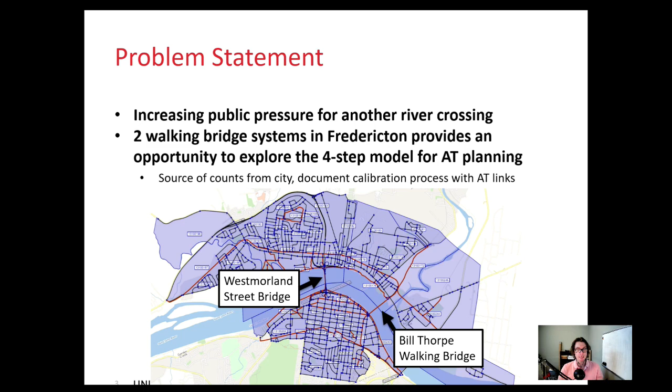Are there fewer people because even though it might look like a more direct route, the population isn't there? It's actually closer to the Bill Thorpe Bridge. So either way, we thought, given that the 4-step model is not typically used in smaller cities, they typically use what's called a 3-step model. That is, they're really planning for car trips only and not for any other trips that can go by other modes. So our hypothesis was that users are paying some kind of cost penalty to the Westmoreland Street Bridge.

What does that mean? Well, if both bridges were equal in terms of how people like them, you would assume that if the travel times were the same, then half the trips would go on one bridge and half the trips would go on the other, that people wouldn't have a preference for one over the other.

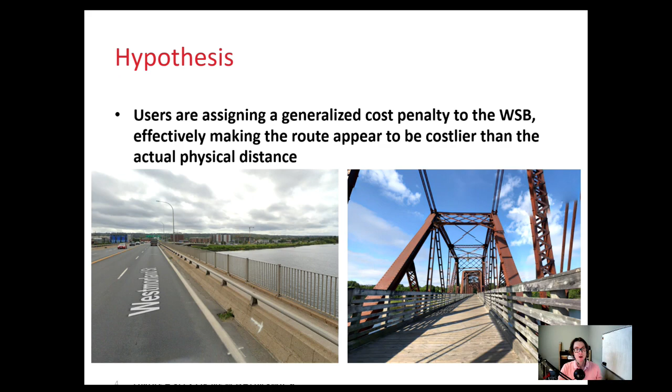You notice we didn't include transit here. And I really wish we could have. The thing is that, for one, at the time, we didn't have any numbers for transit. We didn't have any idea of how many people were taking the transit on a zone-by-zone basis. In addition, when compared to cars, bikes, and walking for going to work, transit is about 1% in the city of Fredericton. So we could have done a lot of work to put the model together, but it probably wouldn't have told us anything different by including those transit trips.

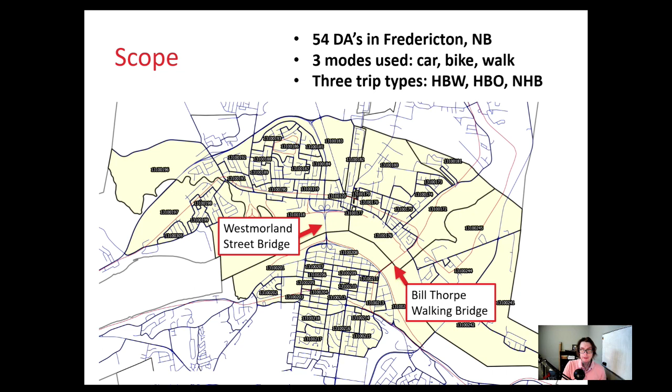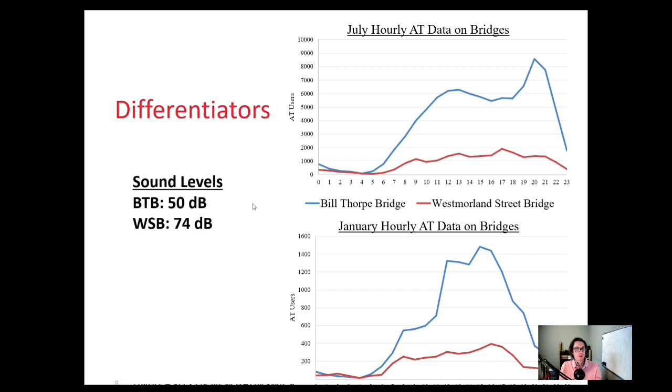So then the first thing was, let's see if we could do everything we could possibly do, how close can we get to the numbers that are in reality? Then the second thing would be, let's calibrate everything, the Westmoreland Street Bridge, and see what numbers we get. And then finally, let's add in a new bridge. Let's have some fun and see what would happen to put a new bridge in.

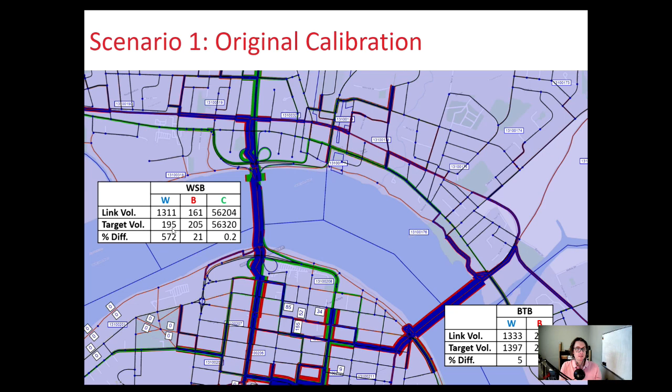And so what we see is that there should be about 1,000 more walking trips on the Westmoreland Street Bridge than there are in reality. The perceptions are probably correct. It is theoretically a shorter way for people to go, but they're not using it to what we should expect. So then we said, well, what can we do to make this work? How do we make these volumes get close? Do the one thing that we could change, and that was the length of the bridge.

Why would we change the length of the bridge? Well, again, people are paying some kind of penalty for that bridge. They don't like it. So we're trying to equate it to something that we could probably easily define. And what we did is I said, well, let's make the bridge longer to the point at which the volumes on the bridge for our model equate to what they are in reality. So this segment length here is about 500 meters. In our model, we kept increasing that length more and more, until we got to about 2 kilometers.

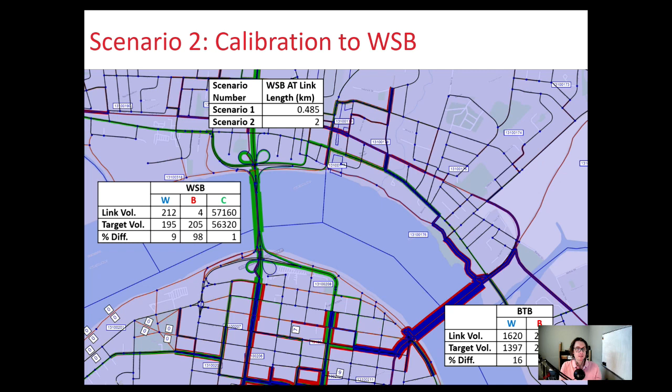So what that meant was that in order for us to calibrate this, in order for the volumes to match what it is in reality, it's like people were thinking this bridge was 3 to 4 times longer than it actually is. That's the equivalent penalty that people are paying. So we decided, well, let's put in another bridge. We can do that. All it is is a matter of drawing a link. The hard part's building the model. And we know that the city has looked at this in the past, and it's quite expensive to do this, and I don't know if we even know if it's possible to do this on the piers. But in a model, links are cheap, so that's what we did.

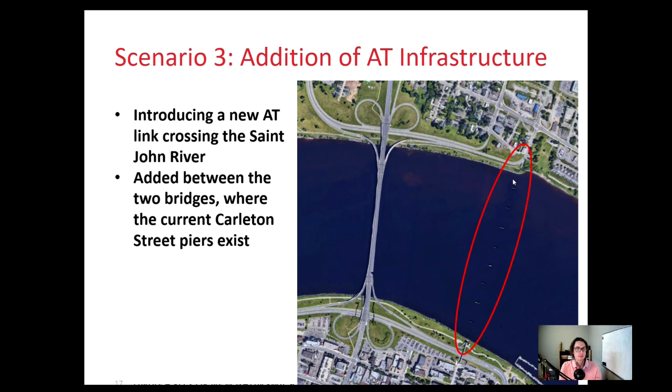So we put in this extra link, and what did we find? Well, because people pay a penalty to use Westmoreland Street Bridge, everybody who was going there would go to this new link. And it also would draw from people that are now going a little bit longer over on the Bill Thorpe Bridge. You'd expect, on average per day, about 2,000 active transportation trips. Everybody that was on Westmoreland Street Bridge would go there, and it would take some from the other bridge. So that's suggesting that if they were to build a new link or to upgrade the bridge so that it was more attractive compared to the Bill Thorpe Bridge, that it would attract users.

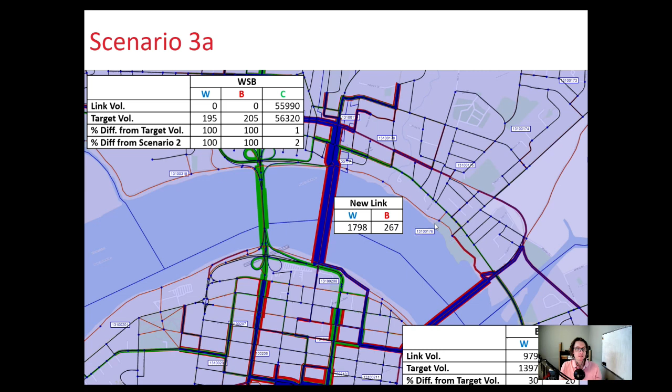There are some limitations with our work. With this kind of work, we didn't include anything about recreation trips, though we did account for non-home based trips. And we're using journey to work data, and journey to work only covers really a small percentage of overall trip making, so it's not perfect. But given what we were able to determine with this, from what I can tell, it's one of the first applications, certainly in a small city sense, to see whether you could answer this kind of question with this particular model: whether an active transportation link would attract users and reduce automobile use.

So from our model, it's basically people are looking at the bridge like it needs to be 3 to 4 times longer to AT users. And we ended up taking some numbers from Los Angeles, a very car-dependent city, and they seem to work for Fredericton. And my final point is that there's a lot of value for small cities: if you're trying to determine the connection between active transportation use and driving, whether people are going to change from one to the other, a model like this helps you compare and can help you answer whether an AT infrastructure upgrade would result in some change.

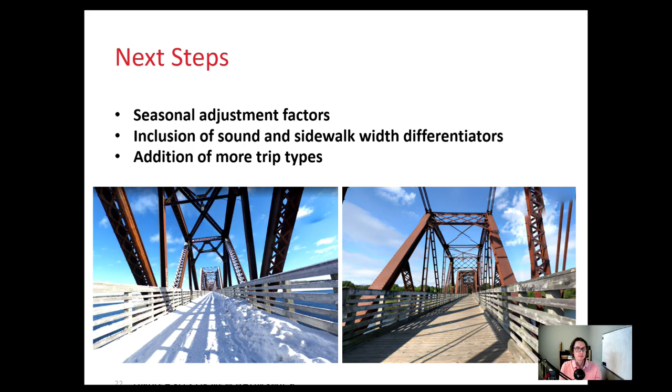So now, I'd love to do more of this work. We need to look at seasonal adjustment factors. We didn't include anything about sound and sidewalk widths, differentiators, or different trip types, but we did find a really interesting technique and really interesting questions.